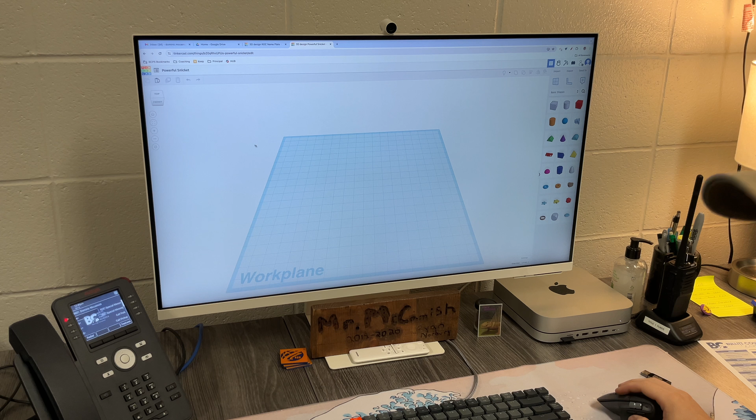Right, so let's look at how to start off using a 3D printer. So first of all, most of our kids are familiar with programs like Tinkercad. There are others that kids can use too, but Tinkercad is one of the easiest and simplest. You can start off with a totally blank slate here, and you can see it's a 3D plane, right?

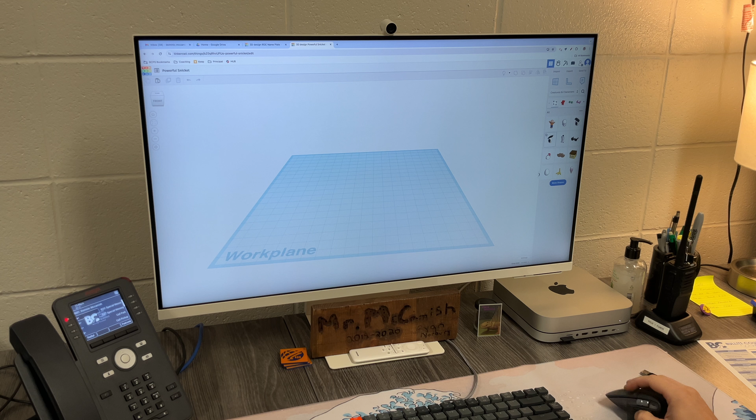So you can move things around. They can start off with basic shapes over here, or they can go to like creatures and whatever. There's all kinds of different things that they can do. So like here's a tree, right? Crazy looking Christmas tree. You can move around it in 3 dimensions.

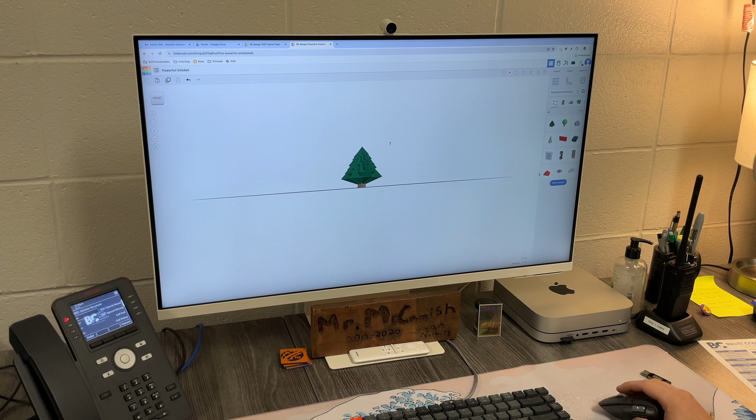If you want to see the front top of it, you can use this cube over to the left hand side to do that. You can look at the front. There are all kinds of ways that you can interact with it. And then there's a bunch of different really cool stuff. See these little squares all over, those are the measurements.

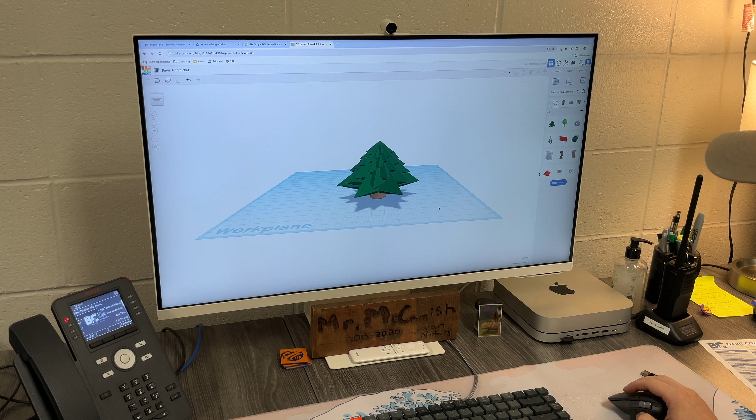So I can change the height of it. I can change the width. You can do all kinds of things. And of course, if you mess it up, you can do Command or Control Z. You can undo that. There are lots of different things you can do. So you can even put different shapes together.

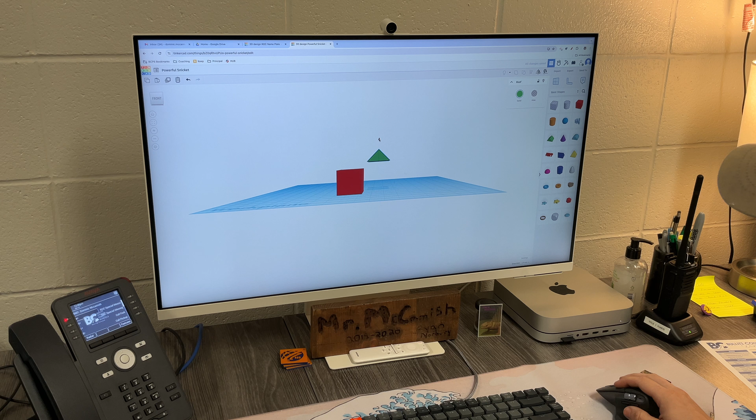So I can take these two, and there's this little triangle up here. I can click on that and bring it to a different height. So I can make it level with that, and then I could put it on top of this other square. And there I go building a house.

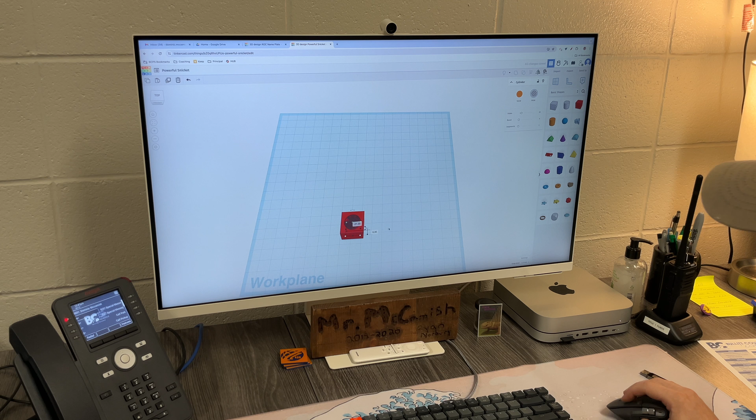There are other things you can do, like put holes in things. So let's say I wanted a cube with a cylindrical hole, I could put that in there, and then that's how they show you a hole. So once you've got your shape, and we're going to use this because I'm making this. This is going to be my last going away thing.

So once you have your shape, you go up to Export over here in the top right hand corner. And by the way, there's going to be an iMac with this set up for you guys. So you go to Export, you're going to choose STL, and it will save that to your downloads. Alright, so once that saves, it'll save to your downloads.

So on a Mac, your downloads are down here. But what you're going to want to do is come down to this. You're going to want to open up the Launchpad is what it's called, and that's like all these apps. And there's one called PrusaSlicer on the iMac. That's going to be next to the 3D printer, and you open that.

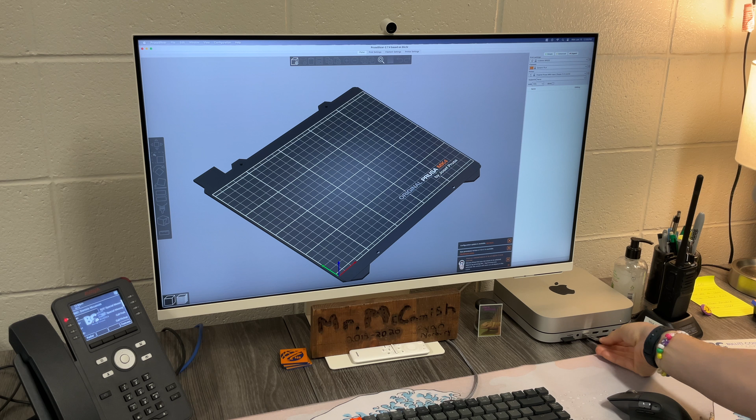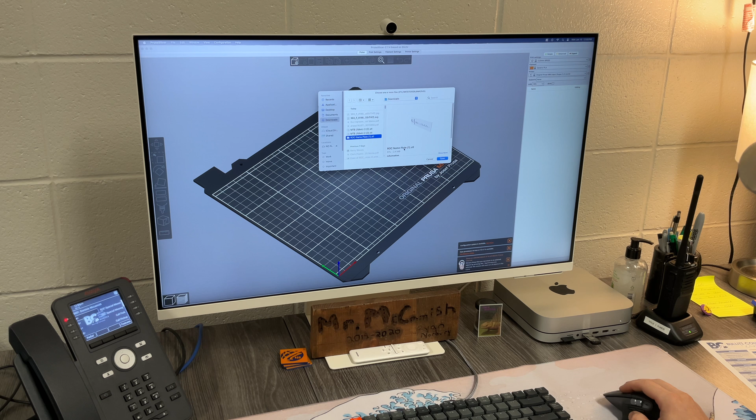And you're going to make sure you get this USB, and you plug it into the iMac. On the iMac, it'll be on the back. On my computer, it's on the front. And you're going to go to File at the top, Import, and the very top import thing. This is like STL and all kinds of other stuff. And if it's not already selected, select Downloads, go to RCC Name Plate in my case, or whatever the file is that you downloaded, and there it is. Okay?

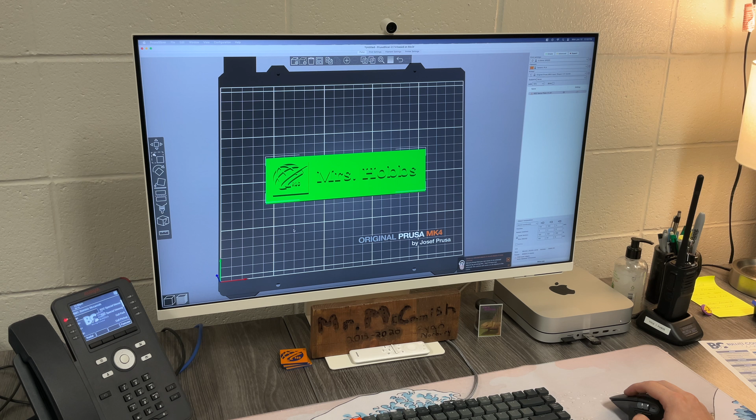So you can, again, look at it. You can't change it like you can in Tinkercad. You can zoom in and zoom out, but you can't change it in the same way. So then down here in this corner, there's the Preview button. You have to hit Preview. And basically, it's going to make sure that nothing is horrible, okay? It wants to make sure that everything is going to be good when it prints. It doesn't want stuff to sag or anything like that.

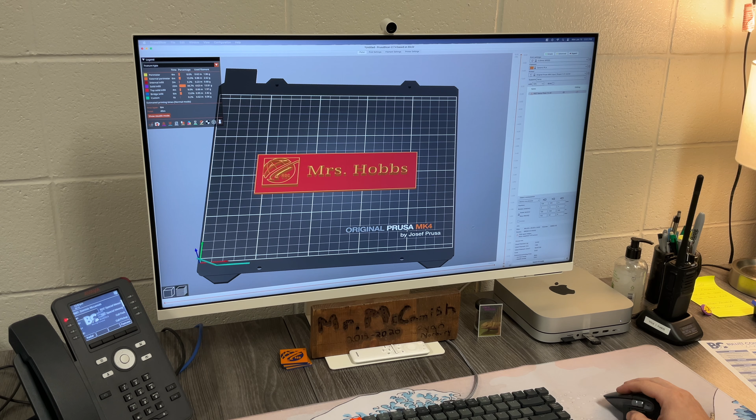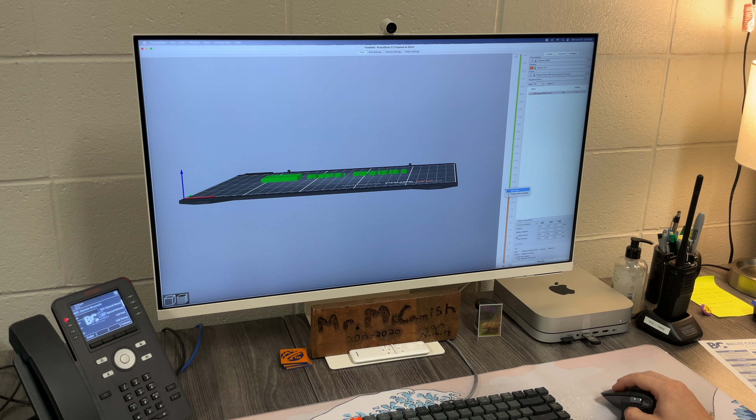And then I'm going to do something a little bit advanced that you don't need to do. So I'm going to actually make it 2 different colors. I'm going to ask it to do a color change. And to do that, I'm going to use this little slider over to the side, hit this little plus sign, and hit Edit Color. I'll change that to orange. It doesn't really matter, but... And so now it knows from that point up, it needs to be 2 different colors.

And then once you have previewed it and it doesn't come up with any warnings down here, you hit File at the top, Export, and then the very top one, Export G-code. You're going to select the USB drive, which right now says no name, because I accidentally wiped it. And you hit save, and it'll say, all right, blah, blah, blah, and just hit OK. And this thing down here says exporting finished.

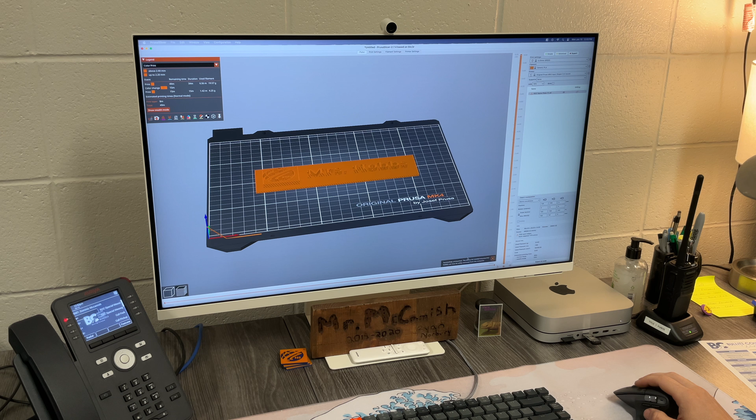You can hit that eject button. Do not take this USB out without ejecting it. You have to hit eject. Okay, and it's ejecting. It says it's successfully unmounted. If you don't hit it in time, you can go here and select the USB over here, and there'll be a little eject button next to it, and you'll hit that eject button there. So then you take that out of there.